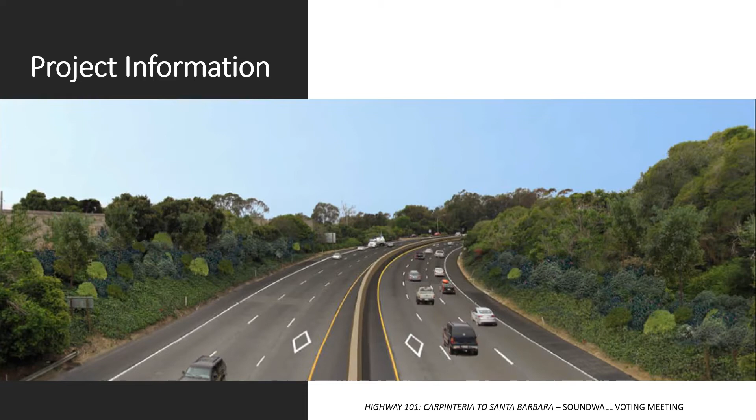I will now briefly describe project information and the status of the Highway 101 Carpinteria to Santa Barbara project. Caltrans is adding one high occupancy vehicle lane, or HOV lane, in each direction on US 101 within the project limits. The project begins at Bailard Avenue in Carpinteria and ends at Sycamore Creek in Santa Barbara. The project is about 11 miles in length.

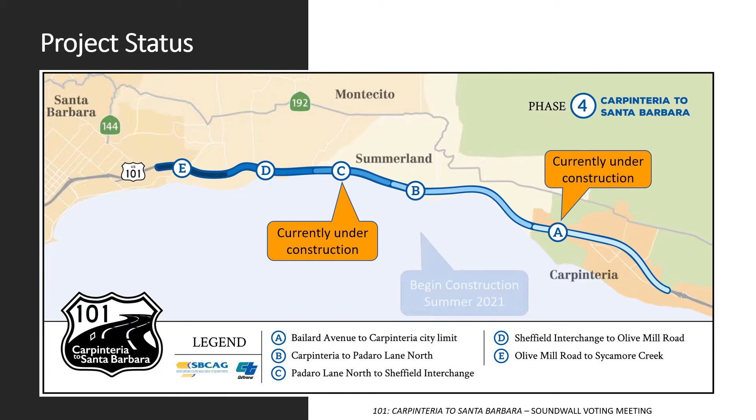The project is divided into 5 segments. Segments A and C are currently under construction. Segment B will begin construction by the summer of 2021. Segments D and E are scheduled to continue final design and permitting through 2021. Right-of-way certification is scheduled in 2022, and construction would begin by 2023.

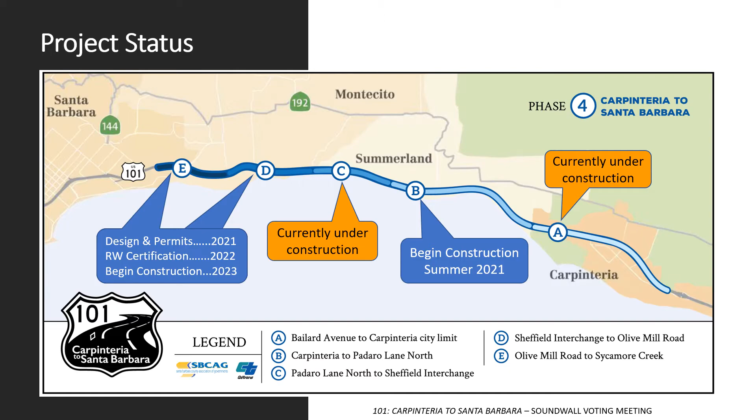Segments D and E, the last two segments of the project, start at Romero Creek in Montecito and end near Sycamore Creek in Santa Barbara. There are a total of 6 proposed sound walls. The location of the proposed sound walls affecting your property, as identified by the red arrows, are part of Segment E along southbound 101 between Butterfly Lane and Olive Mill Road.

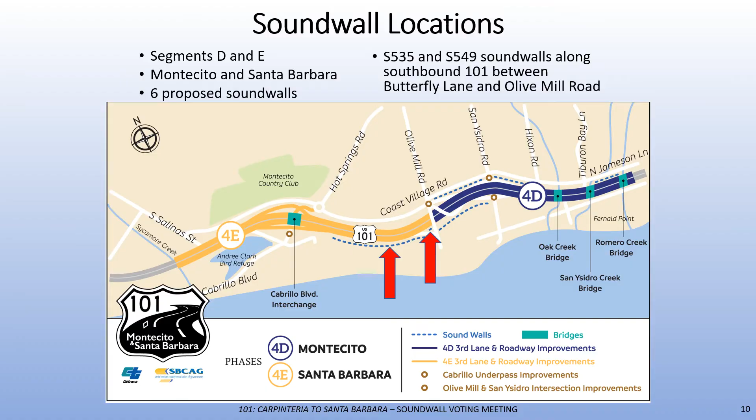I will now describe how sound wall locations are determined. Sound wall locations are determined by following a 7-step process which includes identifying sensitive receptors, measuring existing noise levels, predicting future traffic noise levels, identifying traffic noise impacts, considering noise abatement, determining reasonableness, and making a final sound wall determination.

Caltrans has completed steps 1 through 5 and is currently completing step 6, the process for determining reasonableness for soundwalls. Step 6 has 2 phases. In Phase 1, soundwall locations and dimensions were studied, along with engineering estimates, acoustic feasibility, and environmental effects. Recommendations were incorporated into the environmental document for public review.

In Phase 2, input from affected property owners will be considered through the soundwall voting process. Your participation in soundwall voting is an important part of determining the reasonableness of the soundwall affecting your property. A reasonableness decision will be made by Caltrans considering the recommendations found in Phase 1, along with input from the affected property owners in Phase 2.

The results of the soundwall voting and input from the property owners will be taken into full consideration. However, final approval of soundwalls will depend on the local coastal development permitting process.

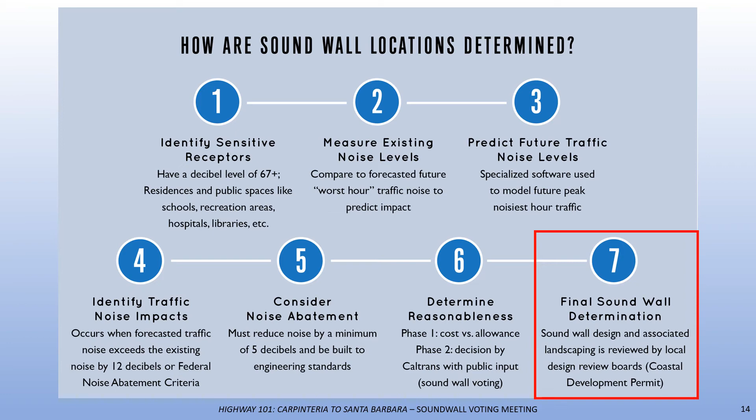I will now provide soundwall information for the two soundwalls affecting your property, S535 and S549. These details were provided in the mail brochures you received along with the voting ballot.

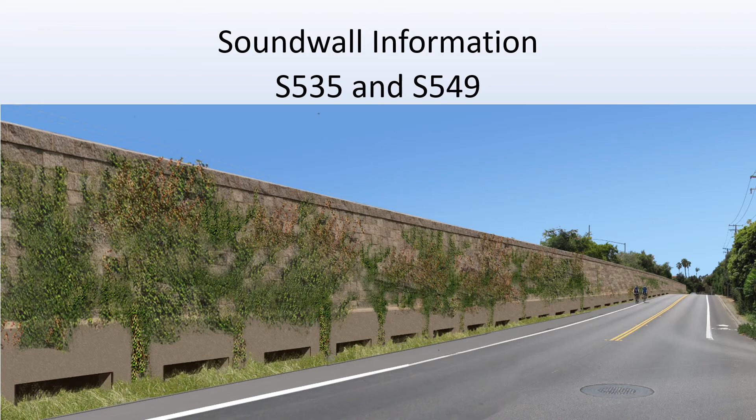Soundwalls are constructed to lessen traffic noise impacts by blocking sound waves toward potential receptors. Soundwall height recommendations were determined in the traffic noise study and would be built to current engineering standards, which require that soundwalls must reduce noise by at least 5 decibels.

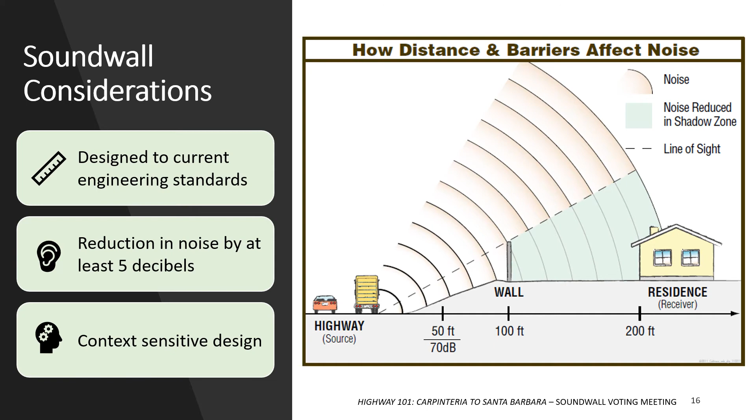To be sensitive to the context, Caltrans will design soundwalls that incorporate the character and aesthetics of their locations while also reducing sound transmission. Some aspects of soundwalls that property owners may consider when submitting their votes include the following.

There is the potential of sunlight being blocked by the soundwall in certain areas at various times of the day. Removal of vegetation may be required during construction if it is located at the proposed soundwall footprint. Aesthetic treatments will be implemented, including texture and planting to blend in with the local setting, reflect community values, and discourage graffiti.

Soundwall construction activities may create dust, noise, vibration, or temporary fencing that may temporarily affect adjacent properties. If a proposed soundwall is within a floodplain, it will include small flood passage openings for drainage.

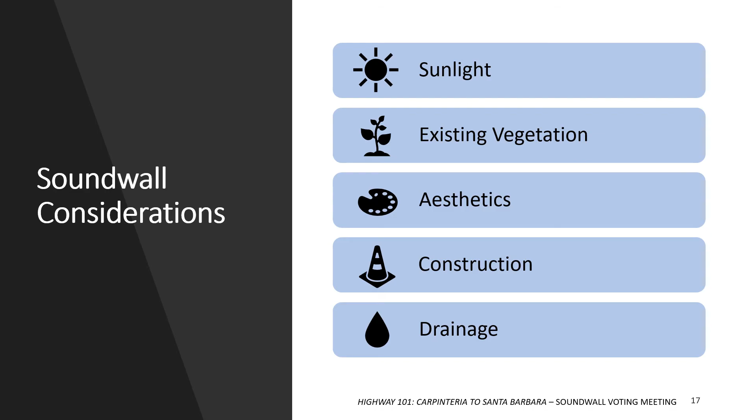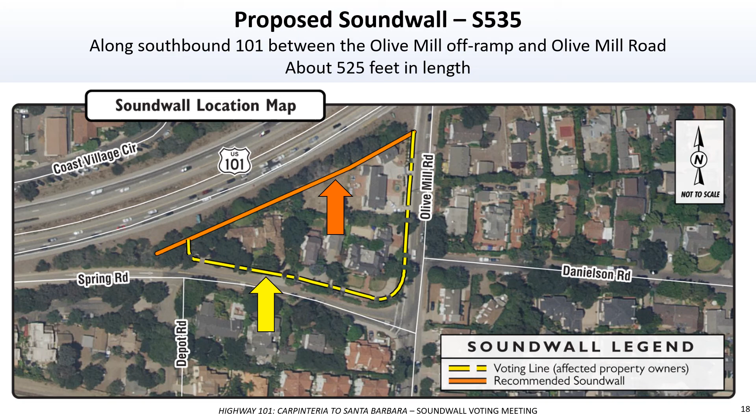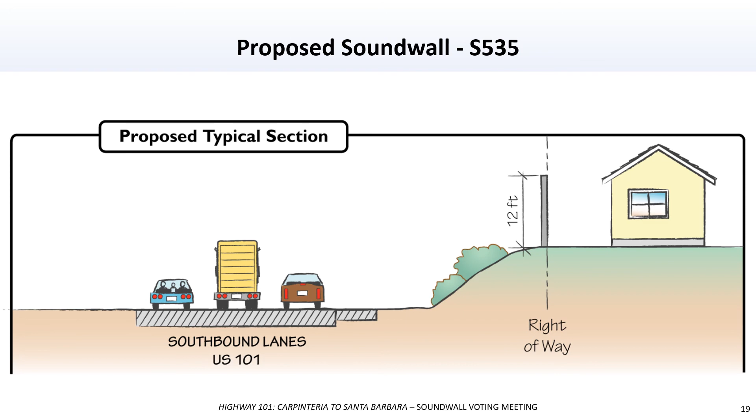Here is a cross-section of the proposed S535 soundwall as it relates to the southbound US 101 and the affected properties. The wall will be about 12 feet tall.

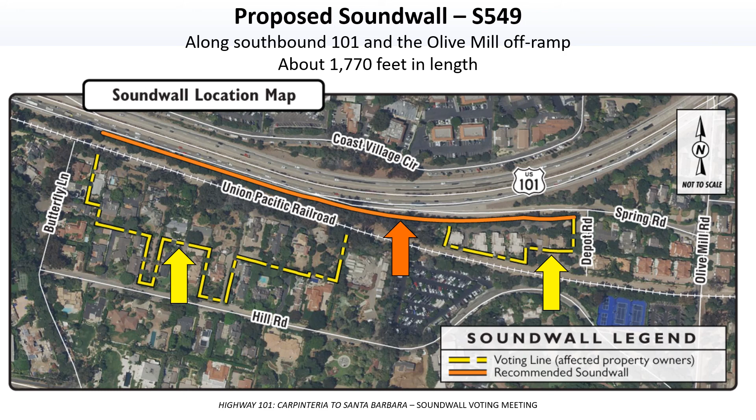The properties located within the area of the yellow dotted line are the affected properties. During the voting process, only the affected property owners within this area would be eligible to vote on the S549 soundwall. The soundwall will only be considered if greater than 50% of these property owners vote yes.

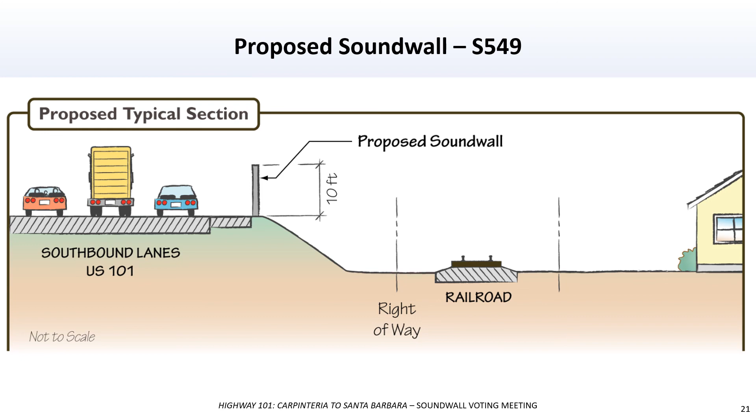Please submit your soundwall vote by one of the two provided methods. Vote online at www.surveymonkey.com/r/soundwalls or return the provided mail ballot by the voting deadline of May 7th.

Final soundwall approval will be granted through the Coastal Development Permit. If you still have questions regarding this soundwall, please contact Caltrans by voicemail, email, or postal service to the attention of Jason Wilkinson, Environmental Branch Chief.